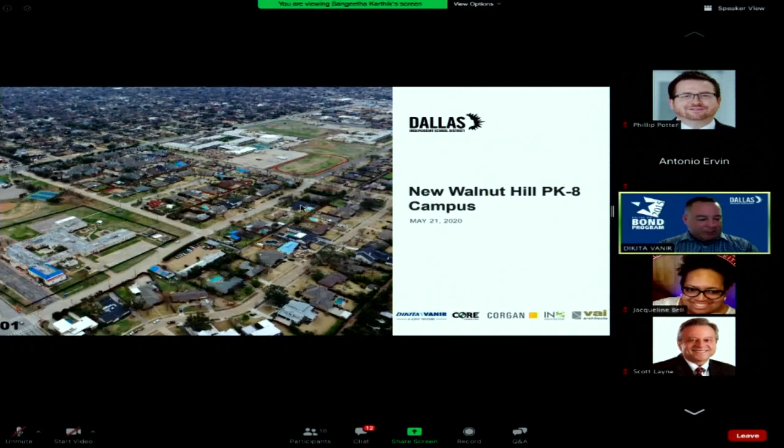As you know, the old Cary Middle School was heavily damaged and will be demolished. Today we intend to show the project development at the stage it is right now for the new Walnut Hill PK8. We've had several meetings, and we intend to show we've listened to people, and we've taken input back to the design. The presentation will be about 15-20 minutes, and at the end there will be an opportunity for feedback.

So today we're going to talk about the schedule, the site plan development and where we are on that based on input, traffic and how we're going to manage it, the construction phase and how that's going to be managed, and we're also going to go into some detail on the school plans and organization of spaces.

The new Walnut Hill PK8 is programmed to support 800 students. It's a little over 120,000 square feet. We're going to go into more detail on the site, academics, and athletics in the following slides.

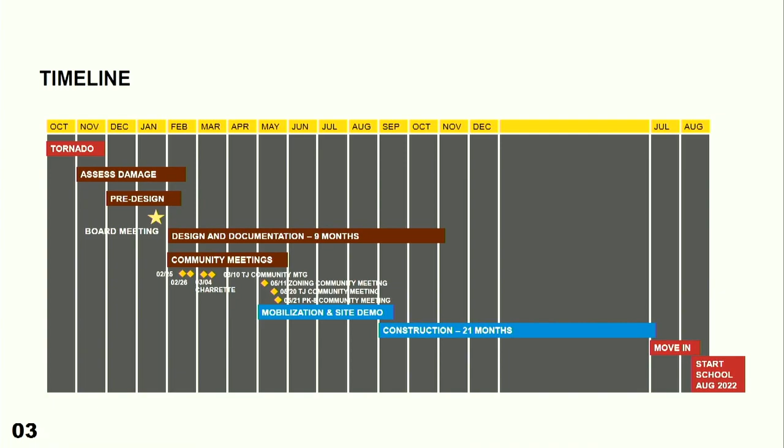The traffic and the paving I will talk to on the next couple of slides. So we can move on.

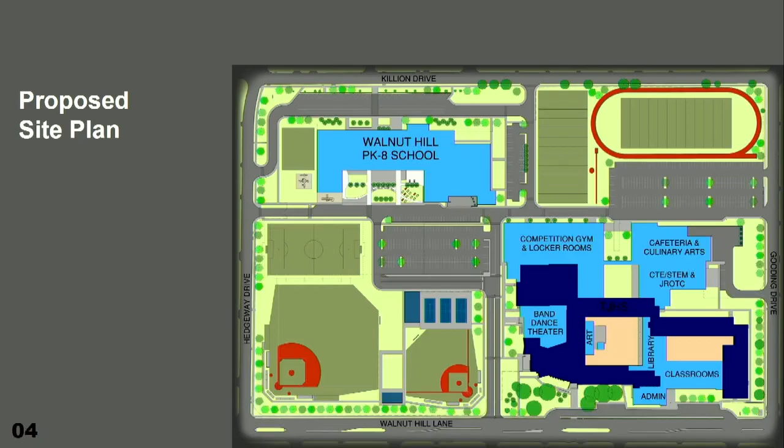So the parent drop off for Walnut Hill will come in off Hedgeway Drive and line up on the north end of the school

and exit out through the internal roads onto Walnut Hill. And I should mention that the traffic light at Walnut Hill that's centered on the site is being replaced. It's currently a 1940s legacy traffic light. It will receive a smart light that can be programmed and scheduled to address traffic flows in the morning and at pickup times, so that we can adjust it to

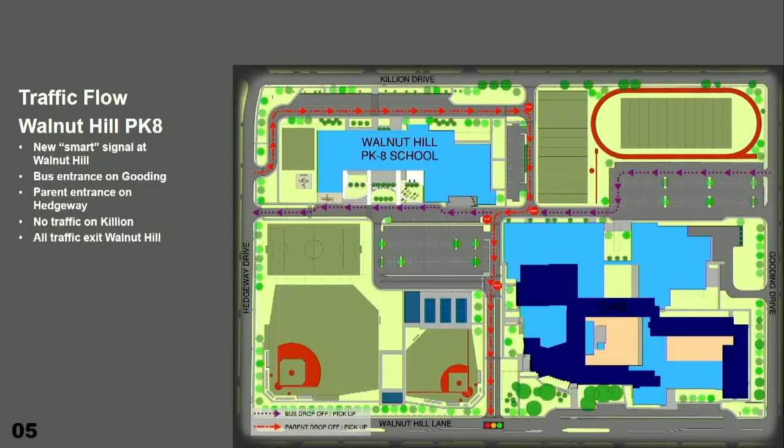So we can move on to the next slide.

Most construction traffic will come in from Walnut Hill. There will be some traffic at the early stages before we get all the paving onto the site that will have to come in from Hedgeway, especially for Walnut Hill, and from Gooding for TJ for the demolition work, and also to prep for the site work.

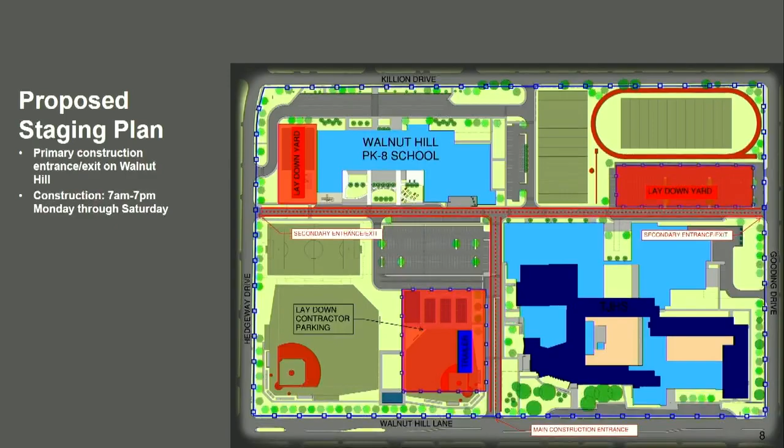We can move on from there, and I think I'm handing it over to Sangeetha at this point.

Thank you, Ola. Good evening, everybody. My name is Sangeetha Karthik, and I'm with Corgan, and we're very excited to present to you the new PK-8 design.

We wanted to let you know that several of you have participated in the community meeting and the workshops. The design that you see over here is a fruition of a lot of effort from a lot of people, from the DISD leadership, several stakeholders, teachers, as well as parents and community members. So these interactive workshops helped us understand what the needs were and what your vision was for this building.

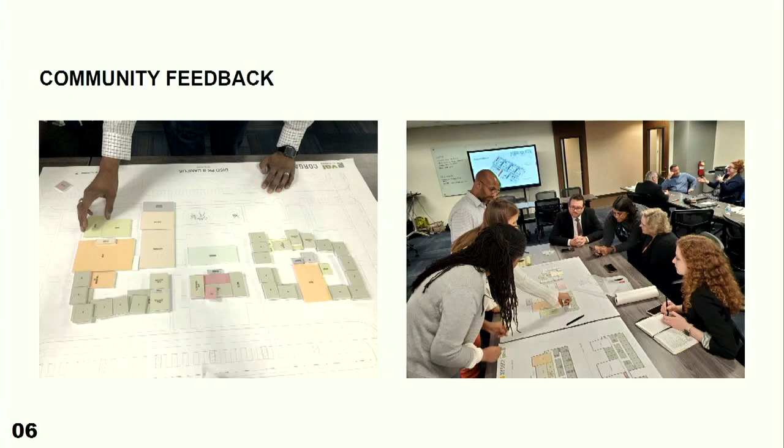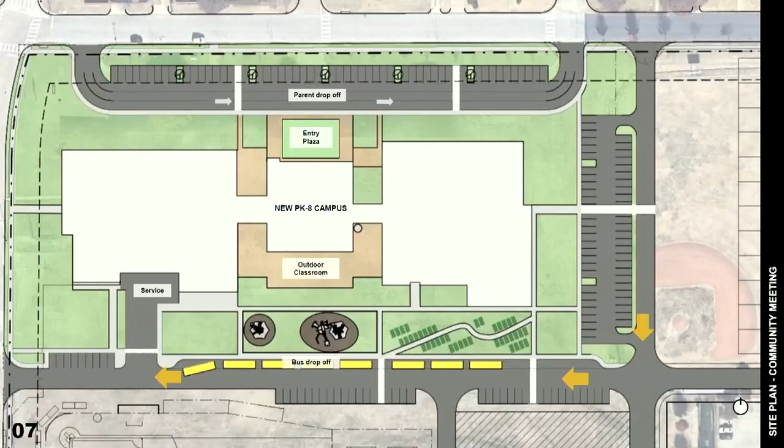So what you see over here is really a refinement of the previous version. Like Ola mentioned, we've accommodated for parents to drop off the students on the north side of the building, but they'll actually enter on Hedgeway, and then they can drop off the students at the front of the building and then move through the side. Now the kids that take the bus would be dropped off on the south side.

So as we started developing the design, we wanted to make sure that the students were connected to learning and the building was connected to the community. So we provided a parent plaza in the front for the parents and students to congregate in at the start of the day or at the end of the day, because we know that the school is an extension of the community. And on the south side, we envisioned a courtyard, which would be an outdoor classroom.

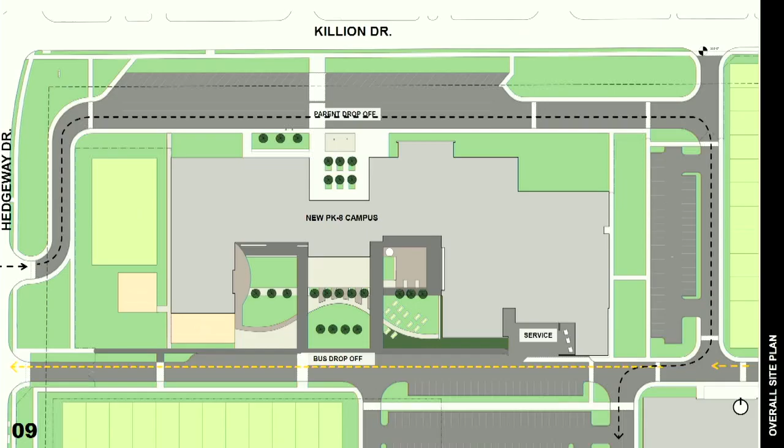As we talked through with the Dallas ISD leadership, several folks from the curriculum team, as well as Principal Potter, we started developing the design to make sure we had thoughtful, meaningful spaces in this courtyard.

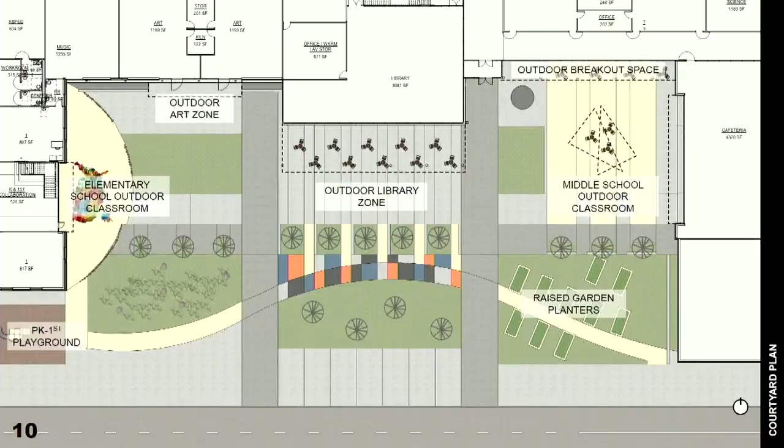Again, when we met with the community, we wanted to make sure we understand what some of the thoughts were, as well as some of the suggestions were. So we heard everyone loud and clear. As you can tell, this is a really tight site.

So we wanted to maximize all of the green space around the building. And so we did that by providing the courtyard that would be an extension of the school, as well as some play fields for the students so they can run around. The entrance off Hedgeway allowed parents to stack on the property.

Again, there was a lot of interest that was expressed for the connection between the cafeteria and the gym. And we also heard that the outdoor views and the connections to the outside was important. So we made sure that all of the learning spaces had windows so the students can see out.

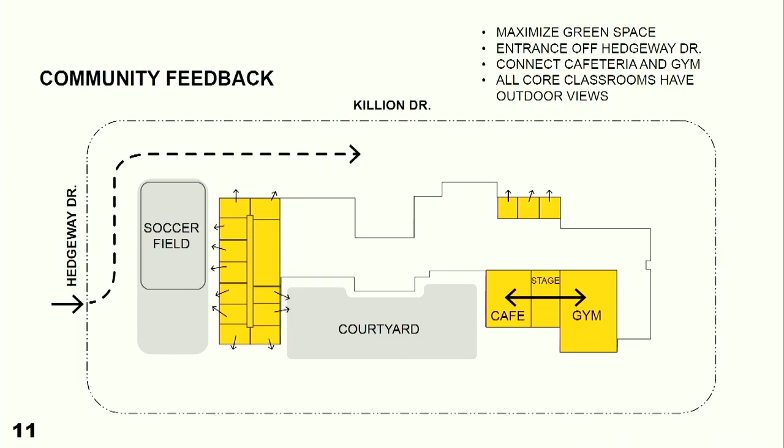Very similar to our concept, we have the elementary school area and the middle school zone, with a lot of the common functions like the library, the cafeteria, and the big gym kind of in the center. We envision the library to be the heart of the school.

You've got the pre-K, kindergarten, and first grade classrooms on the west side. All of their spaces, including their art and science spaces, are located close by. There is also a small gym for the little kids.

As you move through, we've located the special ed areas central to the building, close to the administration and the nurse, but at the same time very central to the entire campus.

Over here you've got the sixth graders with their science lab. You've got your performing arts spaces over here, the cafeteria, kitchen, the big gym that's meant for the middle school, and the locker areas. So that would round out your first floor.

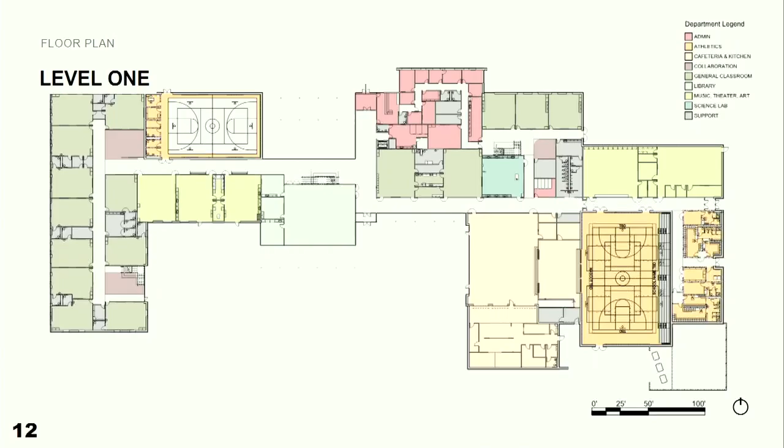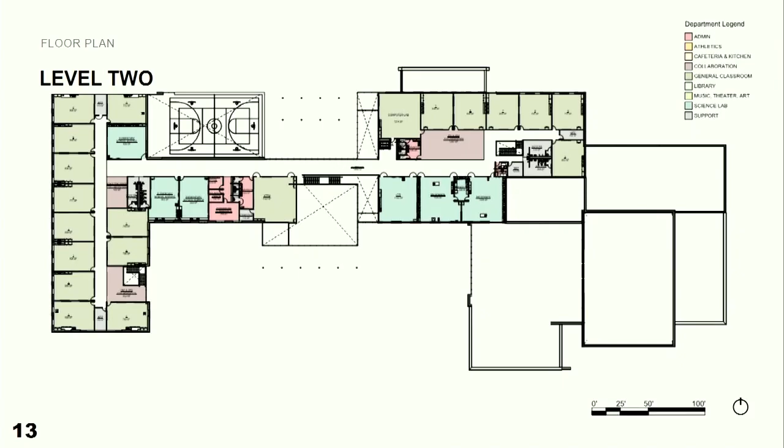On the middle school side, we've got the 7th and 8th graders with their own collaboration space, along with the science labs, the CTE room, and the computer room. So that is the floor plan for the second level.

When we started designing the building, we wanted to make sure that we were informed by research too. We wanted developmentally appropriate interactions where students can learn from each other, so there was an alignment of classroom features with the development of the child. Universal design was another important piece we baked into the design, and we also wanted to make sure there were outdoor areas where they can go and decompress after a stressful day.

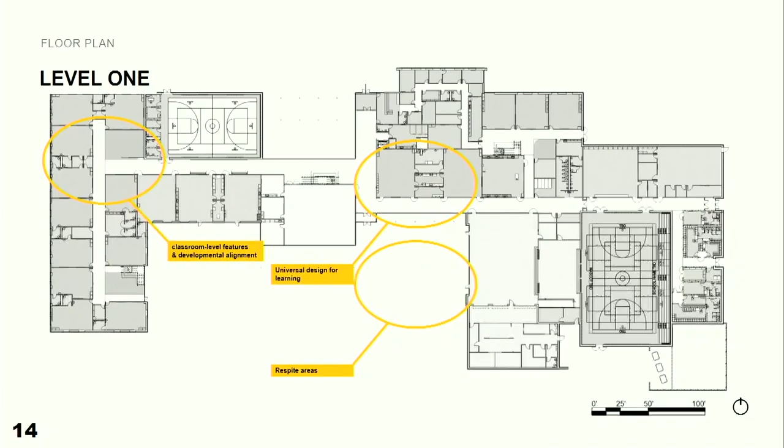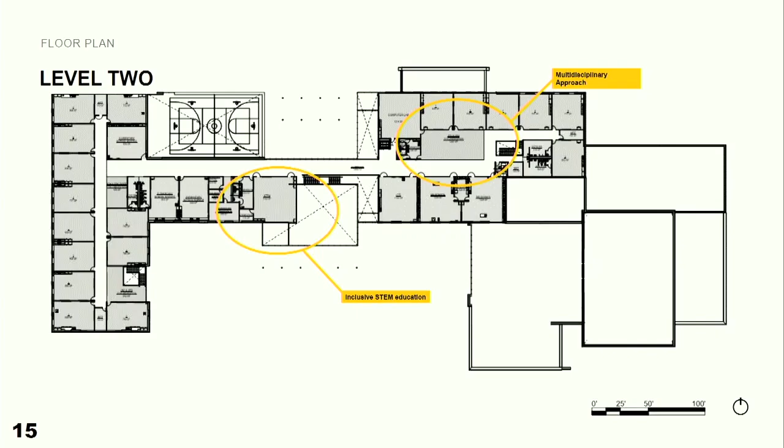The inclusive STEM education approach guided us to place the STEM areas very close to the classroom so it becomes part of the everyday learning. The multidisciplinary approach helped us put all of the students close to the STEM as well as the computer and CTE spaces. So that was the floor plan.

So what did we do for the exterior of the building? Again, we wanted to make sure there was a common visual language. We showed a series of pictures, and the few you're going to see are the ones most people gravitated towards. We understood we wanted this design to be timeless, warm. Even if people could not express what style they liked, we had a value voting where people put dots and told us the pictures they thought would be an appropriate design language for the exterior.

We did the same for the interior. Some of the things we learned were just light, airy spaces that were full of natural light, and again, having thoughtful, meaningful spaces for the kids to learn together in smaller groups or work on their own projects.

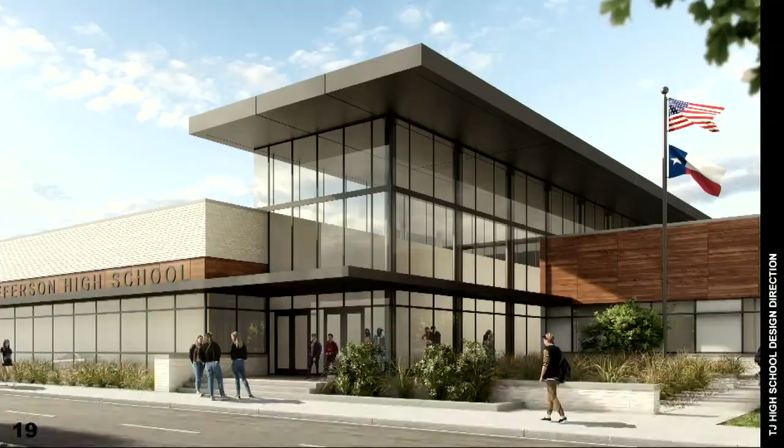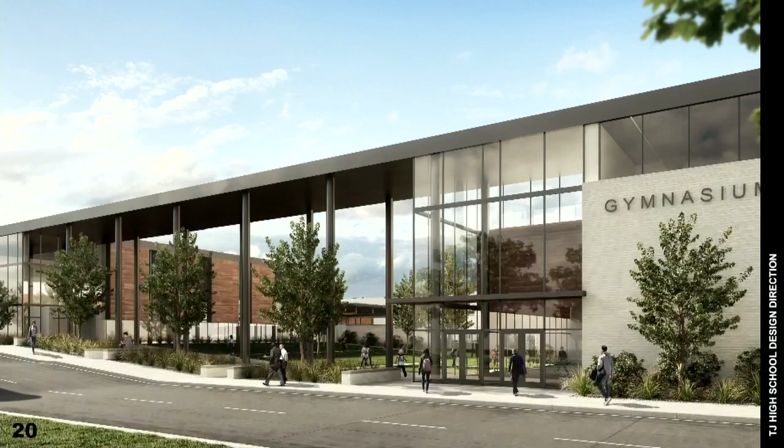As Ola mentioned, this is a huge site, and you've got TJ on one end of the property and the new PK-8 on the other side. We wanted to make sure the visual language was the same between the two buildings. This is actually the proposed design for Jefferson High School. This is their main entry off Walnut Hill, and this is their gym and cafeteria entry on the north side. Very similar to the PK-8 design, it does have a community plaza, just scaled a little bit larger, which will serve as a pre-function space.

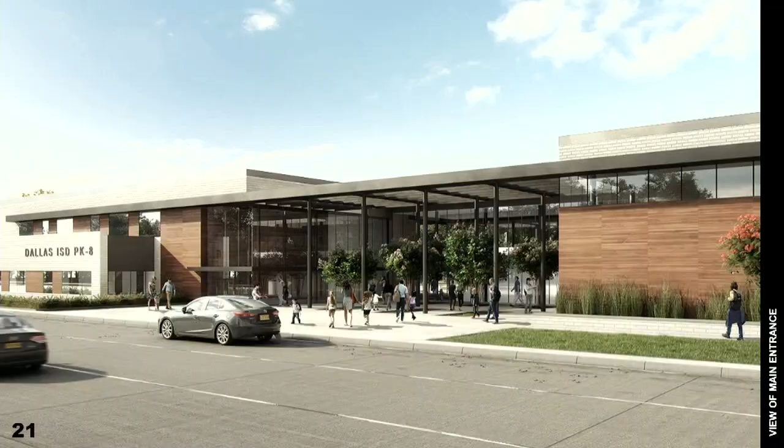So this is going to be your new entrance for the Walnut Hill PK-8. This faces Killion, and again, what you see is a parent or community plaza for parents and students to gather at the start or the end of the day, with a clearly marked entry for visitors to be able to check in.

Again, you see the same materiality, the color of the brick, the wood-like tones all match, so the language is the same, and the entire site feels like one campus.

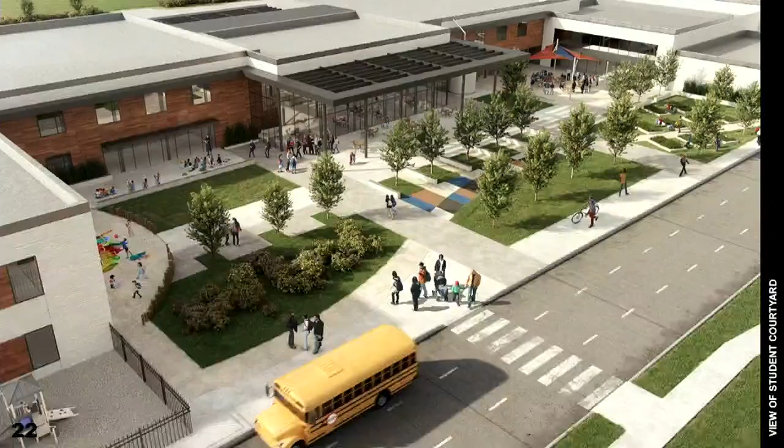What you see here is what we've envisioned on the south side. The kids get dropped off by the bus and walk through the outdoor courtyard, which is also the learning space. You see some raised planter beds on one side, some kids working on their art project outside the art space, along with a few others relaxing or eating a snack. So this is what we visualized on the south end, which is going to be your outdoor classroom.

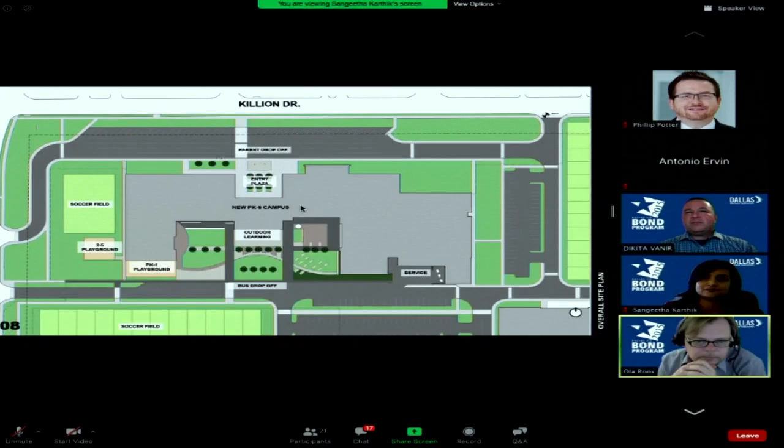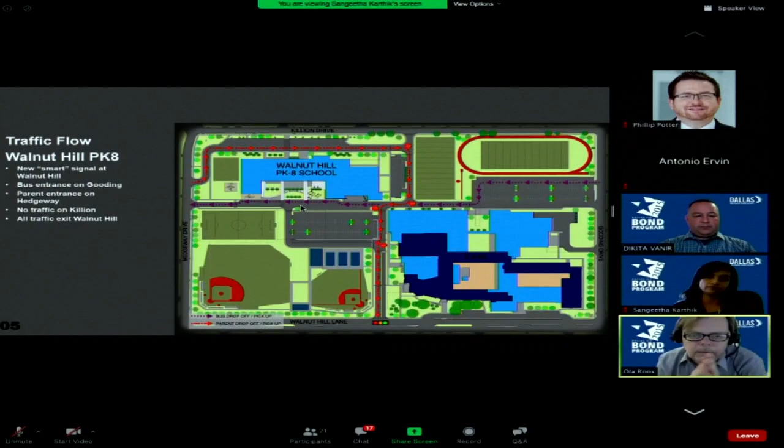Okay, so the traffic coming into Walnut Hill PK-8, the intent is that all the parent drop-off comes in from Hedgeway. We have a separate slip road, if you will, that goes in and comes around the north end of Walnut Hill, and then that traffic is directed south back onto Walnut Hill. The intent is to keep the traffic off Killion. Again, the buses, the purple lines, are coming in from Gooding Drive across the site, dropping off south of Walnut Hill, and then exiting on Walnut Hill. So the intent is to keep the traffic on site and minimize impact on the side streets. Hopefully that answers the question.

All right, thank you, Ola. Another question we have is from Facebook. They're asking, what's the timeline? I can go ahead and answer that one.

Pretty much on Tuesday the 26th, the contractor will be on site. They will be doing some interior demolition of the old Cary facility. As of right now, we've done all the notifications to the state and are moving forward with our demolition process over the next two to three months. That should be the process to remove all the buildings and structures that were damaged. Then roughly in September, we'll be looking at starting all the overall utility site work, road access cuts, tying into city utilities, and making sure all the infrastructure is in place. Then coming January, we'll actually start the foundations and go vertical with the new structures and the renovations of both campuses.